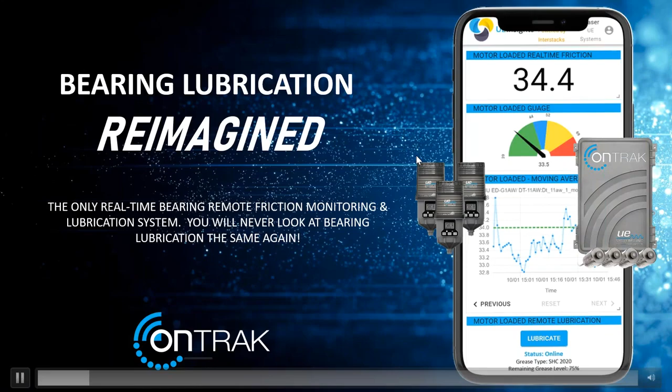I'm really excited today to dive in on our OnTrak SmartLube. So we've got Sean Johnson, who is one of our regional managers. Those of you in the Texas, Oklahoma, Arkansas area have probably spoken with him or worked with him. But he's really excited to share with you all about this solution that we've had out for a little over a year now. So we're kind of talking all the ways that we are reimagining bearing lubrication,

and we're pretty excited about this. The folks that have implemented this at their facilities and doing some pilot programs and things like that, it seems to be something that people are really excited about and getting some really nice results. So hopefully you all can learn a little bit more about it today and be thinking as you're listening to Sean of different applications where this might fit in at your facility. And yeah, we just hope to kind of get you jazzed up about it.

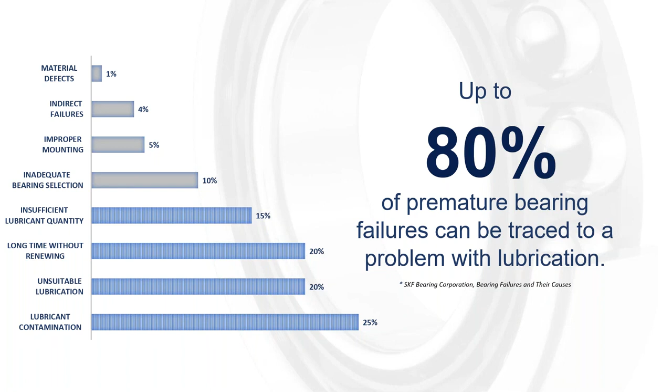Lubricant contamination, 25% makes up of that premature bearing failure. These are all the things that we're focusing on using the OnTrak SmartLube system as the first, and again, the only automatic lubrication system.

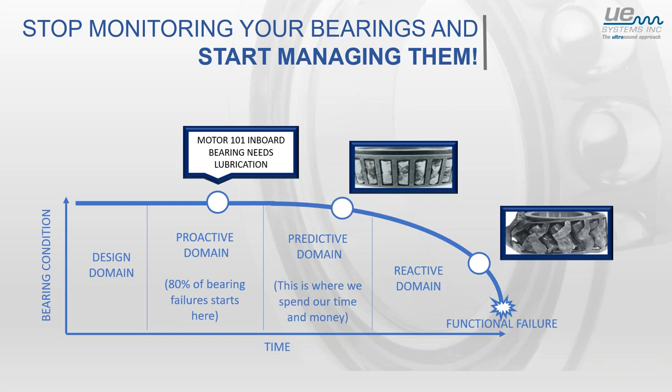So when we think about traditional condition monitoring programs, we often think of the P to F curve or I to P to F curve. How quickly can we detect that onset of failure? So like we discussed in the last slide, 80% of bearing failures is lubrication related. Again, because it all starts with bearing lubrication, that is the area that we want to focus on so that you don't have to worry about bearing failures in the future.

So let's look at the evolution of bearing lubrication, okay? And we'll start from number 1 and work our way to 5. So number 1, that's what we like to call the whenever method, okay? I'm sure some of you are familiar with this term: whenever we get around to it, whenever we get a chance to lubricate bearings. Obviously we're not doing any kind of condition monitoring or using any calculation. We're just getting to it whenever.

The next step up above that would be time-based lubrication. This is what I also like to call the assumption method. Depending on where you're at, I'm sure some of you probably use some type of calculation on some of your assets for the frequency of going out to lubricate a bearing. That is time-based lubrication. Again, using some assumptions, we have to assume that we've got the correct temps, we're assuming the load, and we're assuming the RPM just to get those calculations. And if we're just assuming that, then we're really just assuming that we should lubricate these bearings on that time frequency.

Taking it a notch up would be condition-based monitoring, right? Probably the majority of you are familiar with condition-based monitoring, especially if you're already using ultrasound. And it's very simple. We're going out there on a time basis to collect data, right? To see the friction level of the bearings. And depending on the condition of that bearing, seeing that increase in friction, we will lubricate that asset at that point in time. Now, of course, we've got that gap in between data collection, and we're not going to be able to see if anything occurred in between.

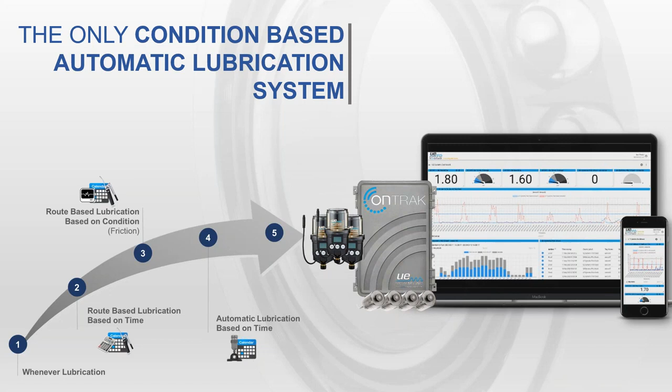Now, when we think of the OnTrak system, most of us are going to think of the box, right? That's what you've seen in the invites and pictures, the box with the OnTrak label. Well, what most people don't realize is that the 850S sensor you see in this picture is the heart of the system. Why, you might ask? That is what is actually measuring the friction. By measuring that friction, we know when friction has gone up and how much grease is required to restore the bearing back to the baseline friction level. And best of all, we're getting those friction levels in real time.

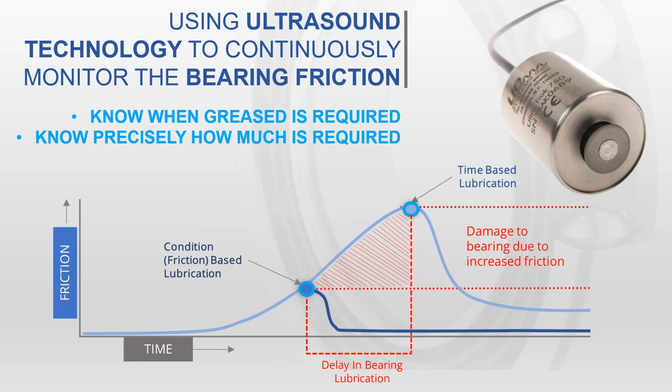Without a system like this, typically we're time-based, month to month, right? What we don't realize is that slight damage occurs every time we delay bearing relubrication. Whether it's overgrease or undergrease, we are causing that slight damage over time. So by having the heart of the system measuring friction in real time, we're able to avoid that delay and potential damage over time.

Now, we designed the 850S sensor for purpose, to measure the friction levels of your bearings. It's a stainless steel sensor, IP67 rated for all weather. We have these sensors all the way up in northern Canada, where I think it was negative 47 degrees Fahrenheit where some of these systems are installed, all the way into the southern parts of the US. The sensor has a dynamic range from 0 to 100 decibels, which allows us to pick up the smallest change in friction.

If you're already a user of ultrasound, you already know about sensitivity adjustment, right? It's one of the things we stress. This sensor has a microprocessor in it that will automatically adjust the sensitivity for you regardless of your application or bearing speed.

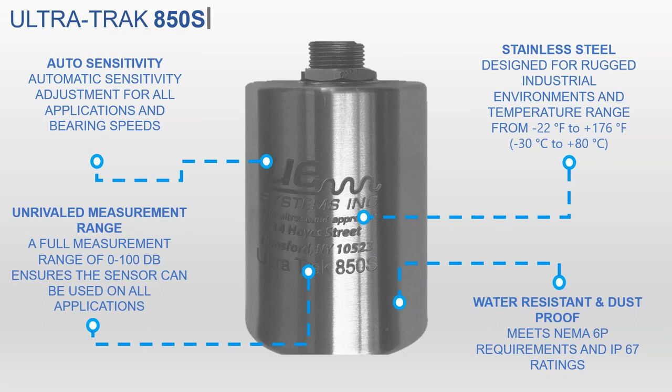So before we move on and talk about the single point lubricators, I wanted to ask you a question. Are you currently using auto lubricators at your facility today?

And maybe on the side, you guys could share what your thoughts are about these automatic lubricators. The reason why I ask is because we did a poll of customers who have used these before, and what we found was actually a love-hate relationship. People are definitely using the auto lubricators, however, they're only using them in areas that would be deemed unsafe or inaccessible for one of us to get to. They may have been used on other applications before, but what ended up happening is customers had to put in another PM just to make sure their lubers are working. I've seen this in my territory, and I'm sure you guys have seen that where you're at.

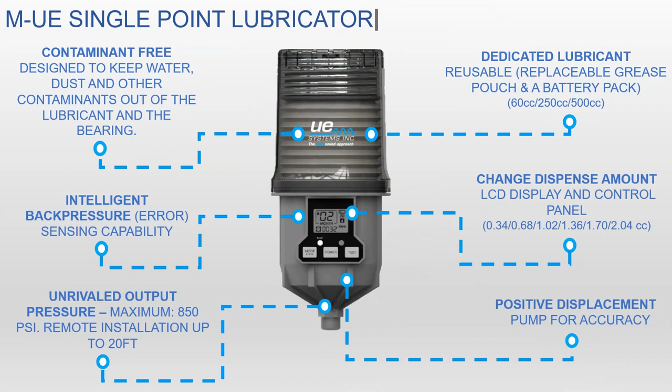Some of the highlights of the single point lubricator: it's a dedicated lubricator with its own dedicated pouch, and we can use any type of grease that you're currently using at your facility. You're not limited on grease types either. Now, we're not a grease provider, but we'll definitely work with you to ensure that you're getting the grease that you're currently using at your plant today. Best of all, it's contaminant free. When installed properly, you don't have to worry about dust or water entering the grease. It's also a smart lubricator with an LCD screen, as you can see there, which allows us to configure that single point lubricator.

This lubricator also has a maximum output pressure of 850 PSI. Now, this doesn't mean we're pumping 850 PSI of grease into the bearing, but this is going to allow us to remotely mount it up to 20 feet away. This lubricator has a ramp up method, so it's only going to output the pressure required to grease that bearing. So we took our 850 sensors and single point lubricator, and we coupled it with IoT-enabled communication, providing insights anywhere at any time.

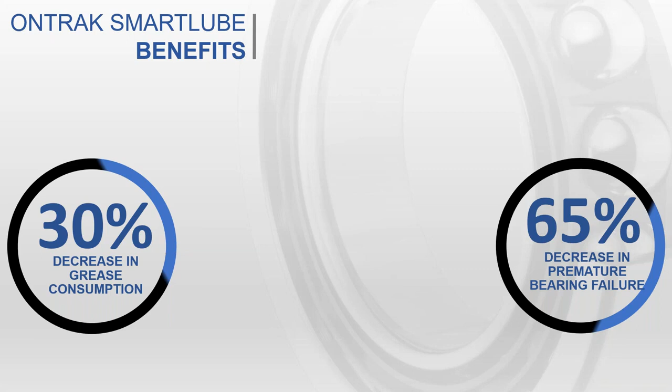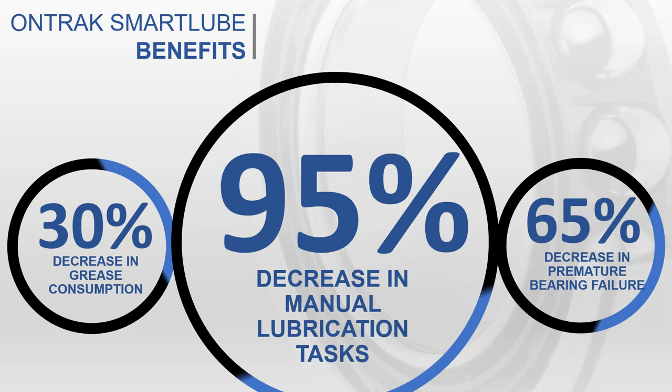Okay, now this is the main benefit that we're being told with the OnTrak, and this really surprised us. It was the decrease in lubrication related tasks up to 95%. So no longer do you have to go and grab your grease gun, and hopefully you grab the right one, go walk out to your field or your line, manually greasing those bearings, or even collecting data. And that could be that non-value added task, that person actually walking out there and spending that time out there to grease. Now you can spend more time in areas where value is added.

So here's a quick overview of the components of the OnTrak SmartLube system. Obviously, you guys can see the OnTrak itself, the edge analytic device. That's what we'll consider our gateway. Very simple. All you have to do is plug it into a wall outlet. It requires 120 volts, and it's ready to go. It's IP67 rated, so you can have this thing inside or outside, rated for all kinds of weather. Now, we coupled that OnTrak with our 850S sensor and the single point lubricators, and of course, our UE Insights. Those are pretty much the main components of the OnTrak system. There's really not much to it.

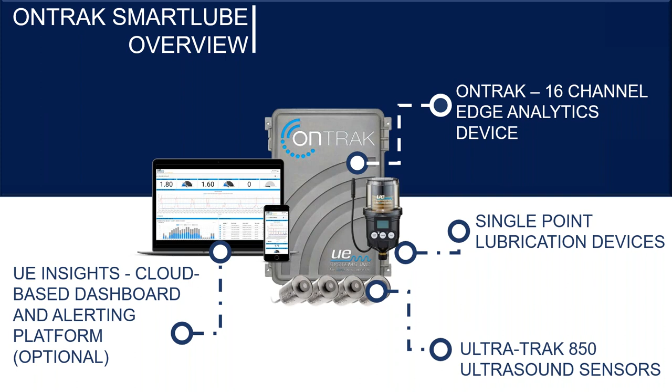Now, the OnTrak system will monitor and lubricate up to 16 bearings. This is a modular system and is designed to fit your needs. So you can have it set up just to measure friction, or both friction and lubrication. Any combination up to 16 independent bearings. There's also no limit to the number of OnTraks you can have at your facility. So again, you can have that modular system. Yes, 16 points per OnTrak, but you can have multiple OnTraks at one site.

Now, when we built the UE Insights, we built it mobile. Being web-based, you can go into your UE Insights from either a tablet, a phone, or even a computer. Best of all, it's not licensed by the number of users or dashboards, and there's no software required to get this to work. It's all web-based.

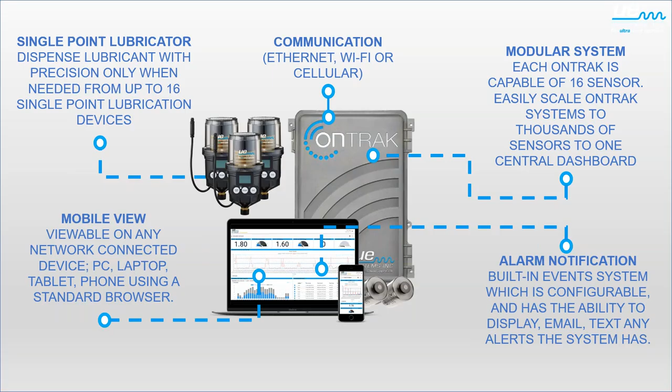Now, those of you who are familiar with condition-based monitoring with ultrasound, we do have some built-in alarm levels that we'll establish based off of our baseline friction level. The first one being an 8 decibel increase from our baseline level. If we do see that 8 decibel increase from our baseline, this is an indication of lack of lubrication. Now, we're not seeing physical damage yet, but at least we're being notified to lubricate this bearing, whether it's manually being greased using that notification from the OnTrak, or using a SmartLube to grease that

bearing. Next would be the 16 decibel rise above baseline. Those who are familiar, that is the point where we hit that failure mode of the bearing. So yes, we can probably throw some grease at it and bring that friction level back down. Just know that grease is not going to fix it, okay? That could potentially go back up because, again, we're already in that failure mode.

Now, if we're seeing a 35 plus decibel increase from our baseline number, now we're talking about critical failure. This machine or asset can go down at a moment's notice and probably should be dealt with ASAP.

Now, when it comes to prescriptive insights, I'm sure you guys who are looking at this right now, it doesn't take long to figure out what's going on. We wanted to design this in a way that was easy for you to understand. So I think you guys can understand the value of something like this for someone who might not necessarily have that technical know-how. So imagine you walk into your shop, you've got the monitor up on the wall and you can see your assets with gauges similar to this. You got 100 of them on.

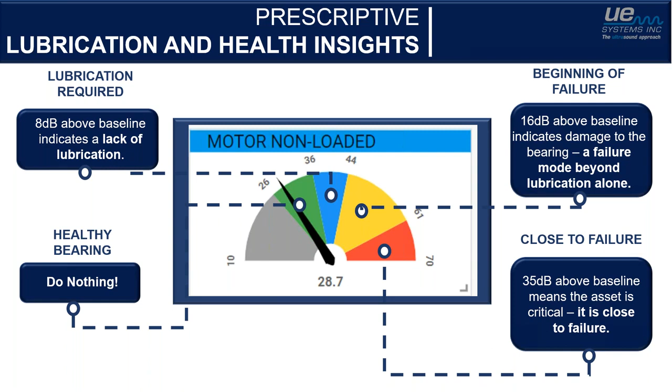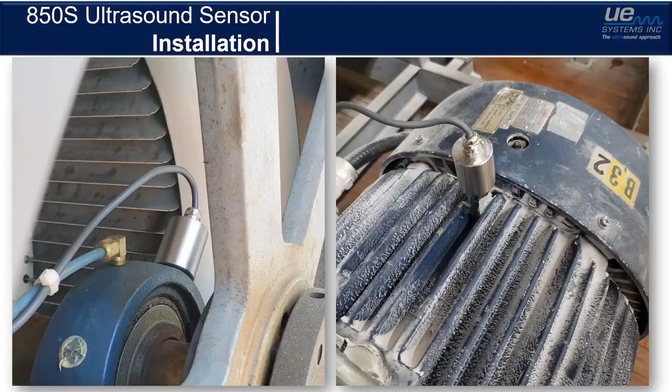like. Here's an example of some sensors mounted. There's really not much to it. You can look at the sensor at the left. It's not pretty, obviously. It's not perfect, but it works, right? And that's what's great about the system. It's so simple to use. The sensor on the left is mounted on a typical pillow block bearing. Nothing fancy about it, but we know we can now monitor that bearing.

Now, looking at the asset to the right, those of you who are familiar with ultrasound and condition monitoring, we don't want to gather our readings off of the fan shroud, because we're going to pick up all that background noise from the fan. And typically on something like this, we might not have a good solid connection to mount that sensor to.

So like you guys can see here, right below the sensor, in between these cooling fins, there is our fin mount kit. And what's really cool about this is it's almost like a stethoscope or a waveguide that's now making a good solid connection, and now we have a good mount for our sensor to listen to that bearing through that housing.

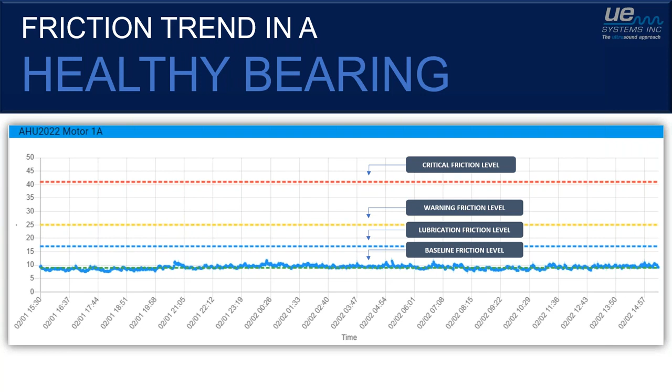And as we can see here, by looking at this screen, we can see those readings, right, with that blue little dots there, the squiggly line. Because that squiggly line is majority on that baseline level, that is telling me that what we're looking at here is a healthy bearing, and I'm sure you guys would agree with me.

Now, if we're seeing an exponential increase in decibels when we're talking about variable speed, and we're seeing double the amount of friction level there in decibels, now we're probably talking about something that is damaged. And I've got an example for you guys to see that here in the next few slides.

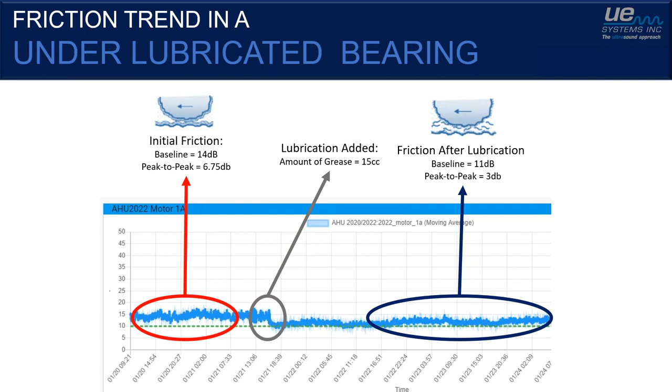So here's a slide showing an under lubricated bearing. Really simple. They're on the left-hand side. You can see that that squiggly line is above that baseline level. Okay, we were reading an initial friction reading of 14 decibels. They went out there, applied 15 cc's of grease, and they were able to bring that baseline friction level down to 11 decibels with a peak to peak of 3 decibels. So there you were able to see that change even on the UE Insights. And again, it's so intuitive, it's really easy to just understand that.

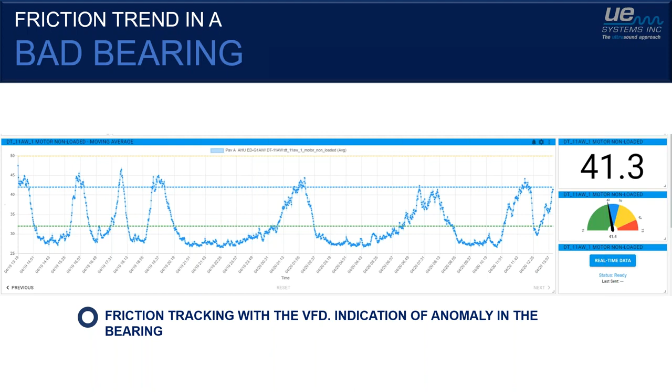Here you can see that we're well below the baseline level, but when it ramps up, it's going up into that lack of lubrication mode. And it goes back down below the baseline level, and ramps back up into the lack of lubrication mode. So what we're seeing here is an exponential increase in decibels. When we see something like this on a variable frequency drive, it could be an indication of a failed bearing.

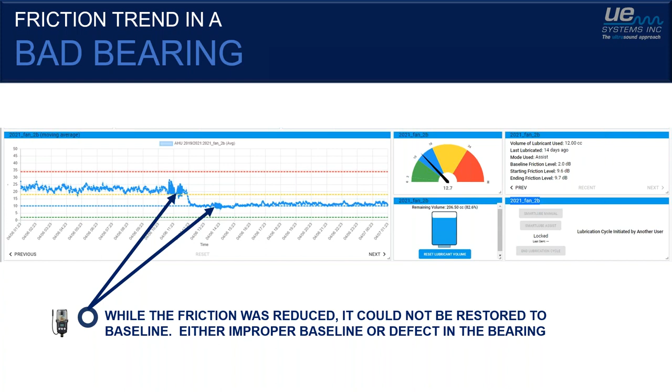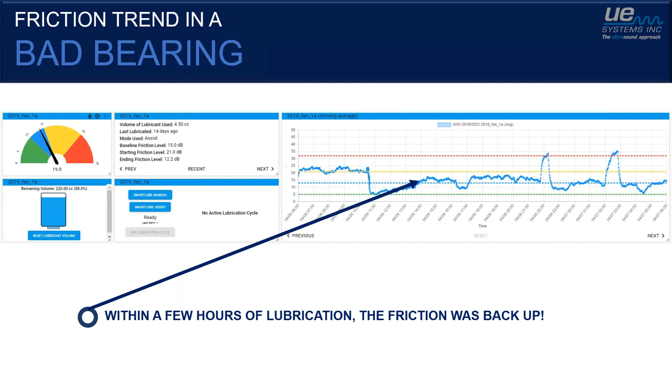So he applied that grease, brought it back down into that baseline level. However, when a bearing has failed, grease will only help reduce that friction level. But once it's failed, it's failed. And here you can see 4 hours later, we're already back into the lack of lubrication mode. So anytime you see that you're trying to fight that baseline number, we're probably dealing with a failed bearing.

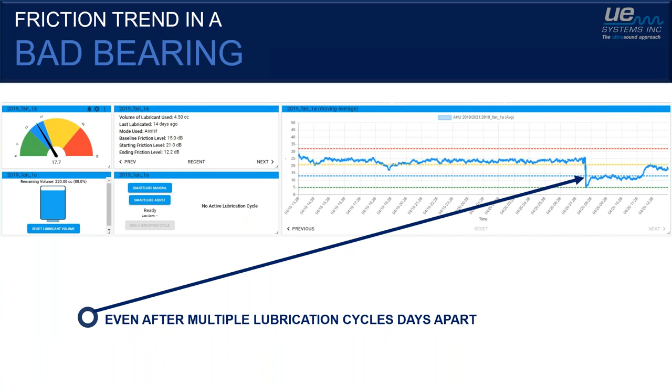So here's that same bearing, even after multiple attempts to bring that friction level back down to the baseline level, and it just keeps climbing like that. Again, if you're fighting that baseline level, we're probably dealing with a failed bearing. You might have to do some further investigation. But again, you're going to be able to see that live in real time, much like what you see here in front of you.

So with that being said, that is, in a nutshell, how we reimagine bearing lubrication, again, with the only condition-based automatic lubrication system.

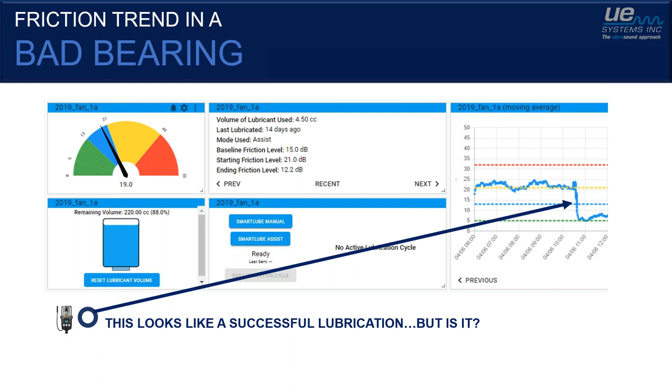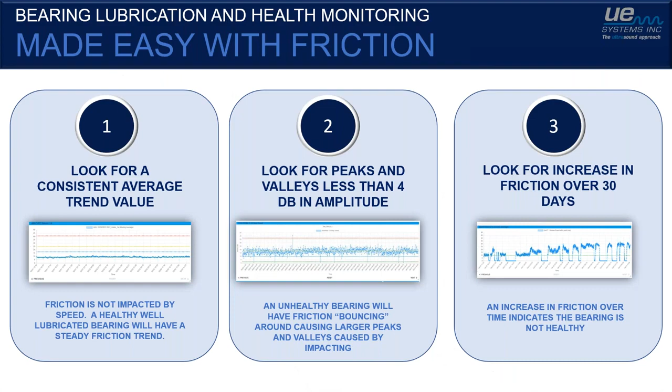Let's see, a couple more. Someone suggested one of the issues they've had in the past with auto lubers is that their environment is very cold, especially in the winter, to where they just don't function. So they were wondering if it's possible to use the sensors to monitor the friction and then do your lubrication manually. Yeah, absolutely. I'm going to go back a little bit to show you guys a slide here.

So you can absolutely use this just to measure those friction levels. You're still going to get those alarm notifications, whether through text or email. After receiving those, verify your friction levels through the UE Insights, and then you can send somebody out there with a manual grease gun to grease that bearing. And what's cool is, if you're allowed to have phones out on the floor, you could break out the cell phone and watch those friction levels drop as you're manually greasing the bearing.

I hope that answers the question. I'm sure it did. I'm sure it did.

Okay, so there are several people talking about cost, and we're not trying to hide that at all. So maybe Sean can talk high level, sort of a per point cost for the SmartLube, knowing that there's definitely variables like the grease type that you're having to use, the cable lengths, the cable types. There's factors that go into it that can shift the cost of this. But on average, what are we looking at per point for the OnTrak SmartLube?

Okay, so if you're just going to use the OnTrak itself, what we're seeing on average, and this of course is all contingent on cable lengths and everything, we're talking roughly about 500 per point-ish. And correct me if I'm wrong, Marie. Yeah, we love the ish, it's perfect. It leaves plenty of wiggle room. Right. Because there's the UE Insights and there's some other factors involved like cellular service and all that, but that's pretty much the gist of it.